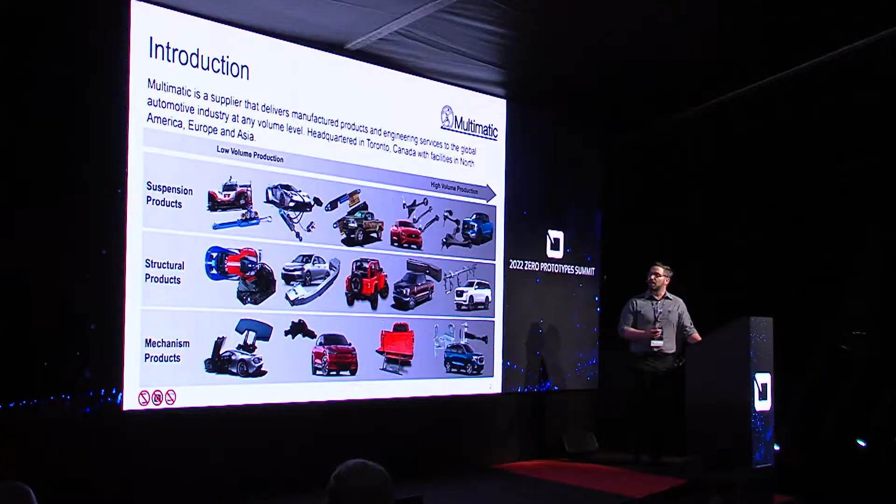Thank you, everyone. So a little bit about Multimatic. For those that don't know, Multimatic is a supplier that delivers manufactured products and engineering services to the global automotive industry. We are headquartered in Toronto, Canada, with facilities in North America, Europe, and Asia. Here's just a small subset of some of the products that we've worked on, and we go everywhere from low volume production all the way to high volume components and projects.

So Kevin and I fall under Multimatic Engineering. We deliver integrated design, analyses, and prototype testing for products ranging from individual components to full vehicle programs.

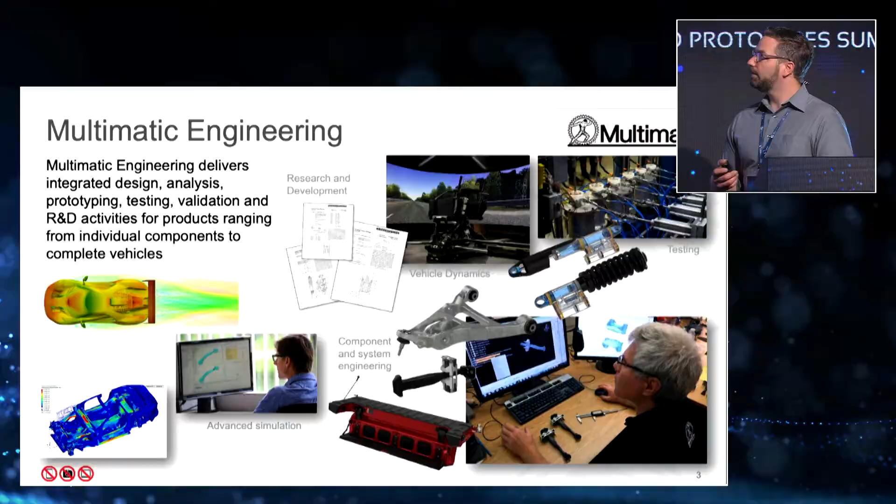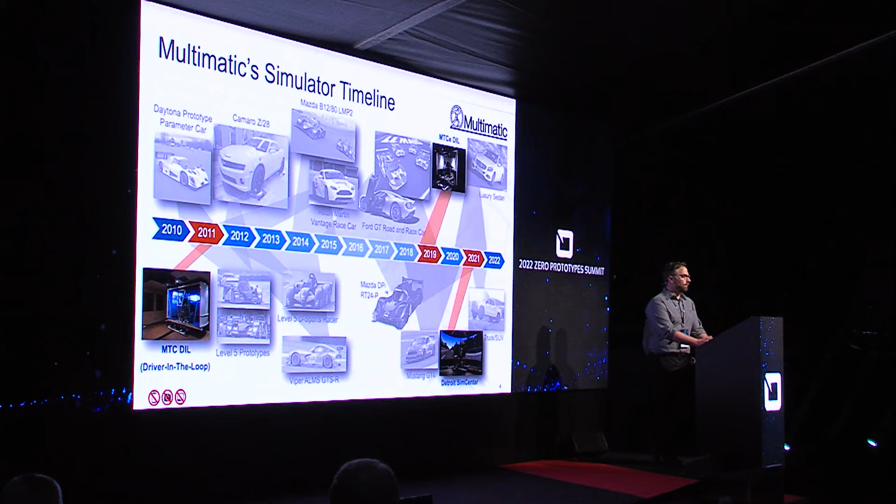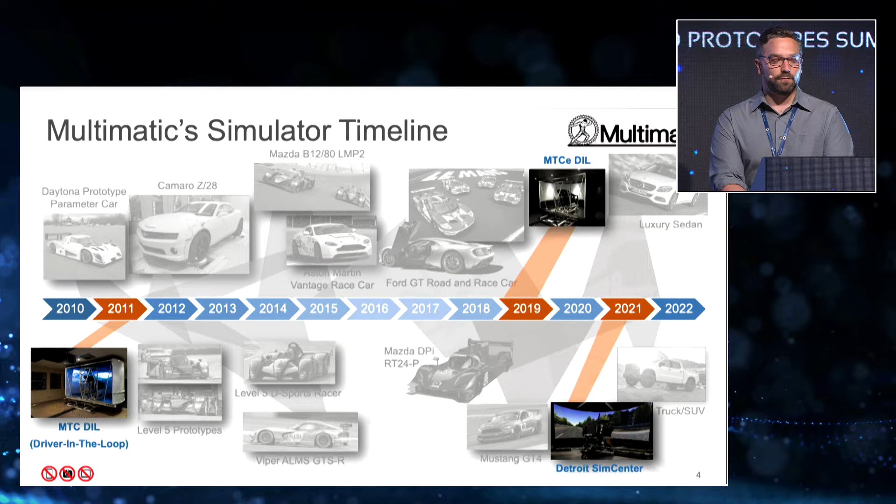Multimatic has quite a long-standing history with VI Grade and driver-in-the-loop simulators. In 2011, we installed the driver-in-the-loop VI Grade simulator at the Multimatic Technical Center in Toronto, Canada. In 2019, we installed a DIL in our UK office. And in 2021, together with VI Grade, we installed a DiM250 at the Detroit Sim Center in Novi, Michigan.

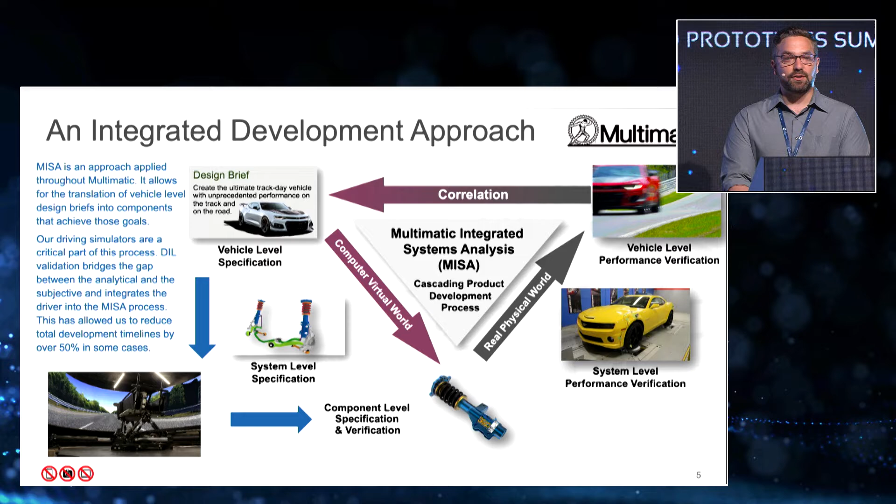So a little bit about the Multimatic Integrated Systems Analysis, or MISA approach. It's an approach that we apply throughout the company, and it allows for the translation of vehicle-level design briefs into components that achieve those goals. Our driving simulator fleet at this point is a critical part of that process and an extension of it. The DIL and the DiM validation bridges the gap, truly, between the analytical and the subjective, and integrates the driver into our MISA process. In some cases, this has allowed us to reduce total development timelines by over 50%.

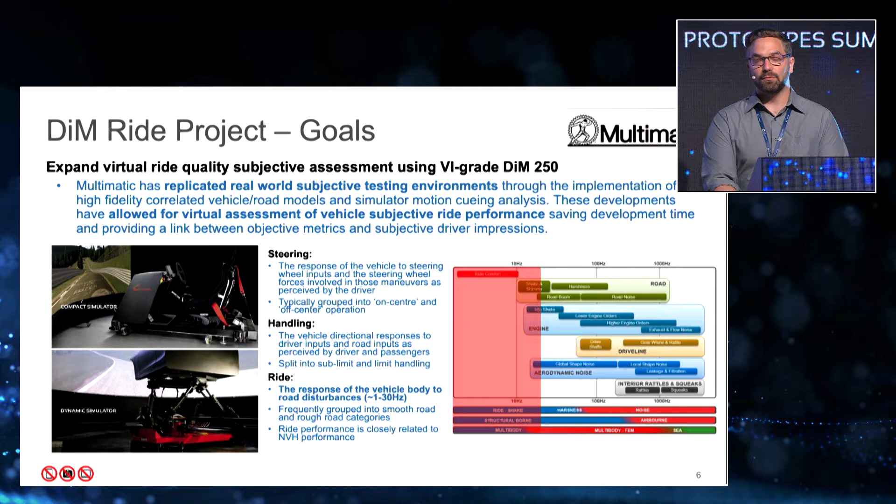So what are the goals of our DiM Ride project? We want to expand the virtual ride quality subjective assessment using our VI Grade DiM250. How do we do that? We've replicated real-world subjective testing environments through high-fidelity correlated vehicle models and our simulator motion cueing analyses. These developments allow for the virtual assessment of subjective ride performance, saving time and providing a link between objective metrics and subjective evaluations. When we talk about ride, we're talking about the response of the vehicle body to road disturbances in the 1 to 30 hertz range.

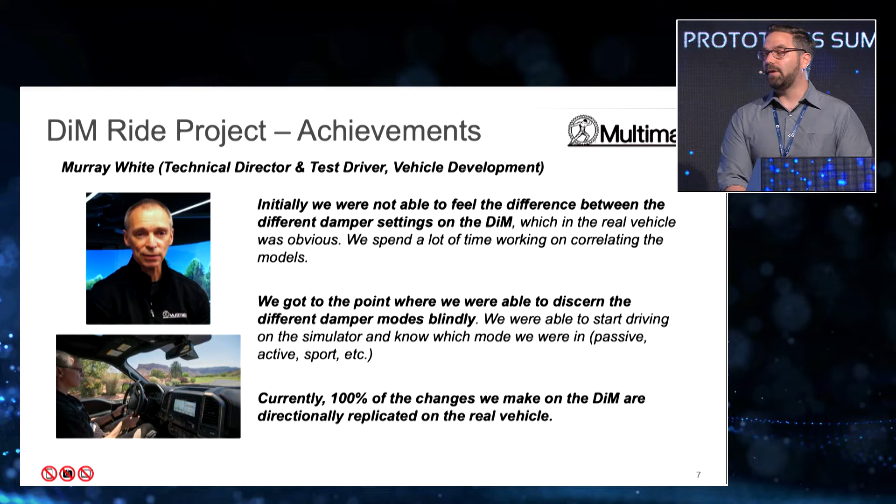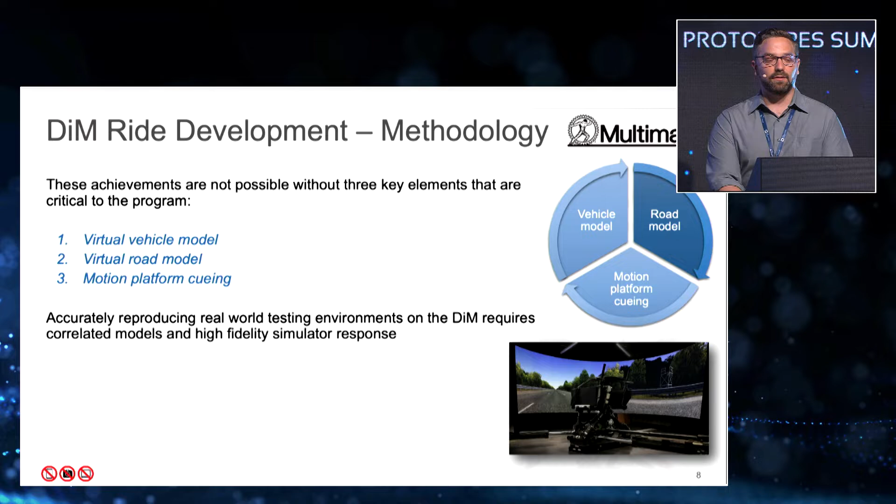So we've come a long way, and how have we done that? In order to achieve the goals we just talked about, we have 3 pillars that contribute to that: the virtual vehicle model, the virtual road model, and motion platform cueing.

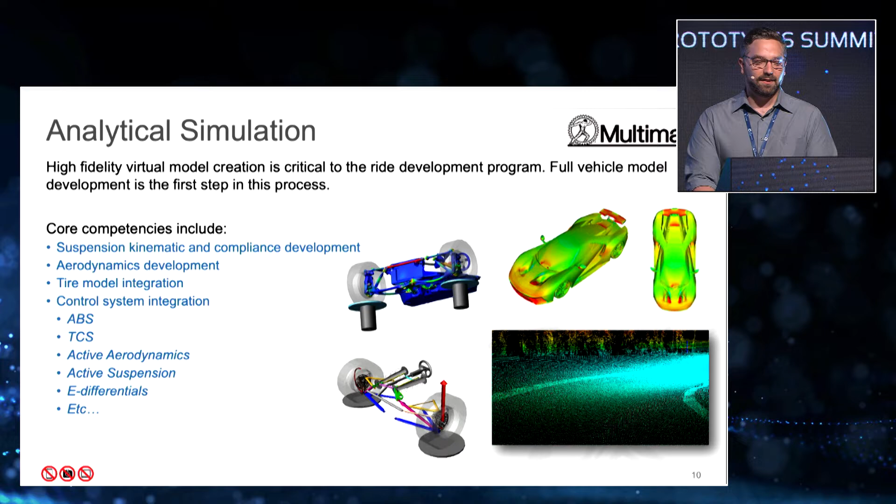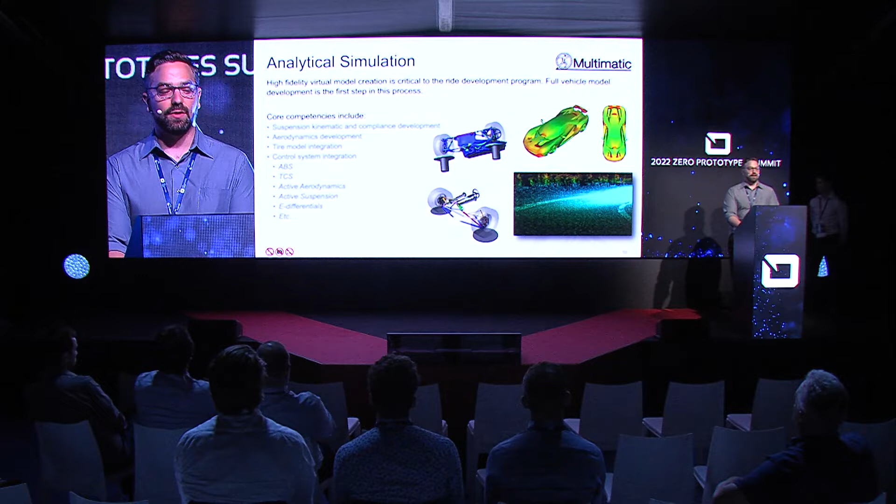For the virtual vehicle model, I think people in this room don't need too much detail, but one slide doesn't really do it justice. A high-fidelity virtual model is critical to the ride development program, or any program for that matter. Some of the core competencies and processes we use include suspension kinematic and compliance development, aero development, tire model integration, and all kinds of control system integration.

Obviously, a model is only as good as it can be correlated to the real world. So we use objective testing methods to make sure those models reflect the real vehicles. Some of the testing we use for that are 4-post, K&C testing, and road and track testing.

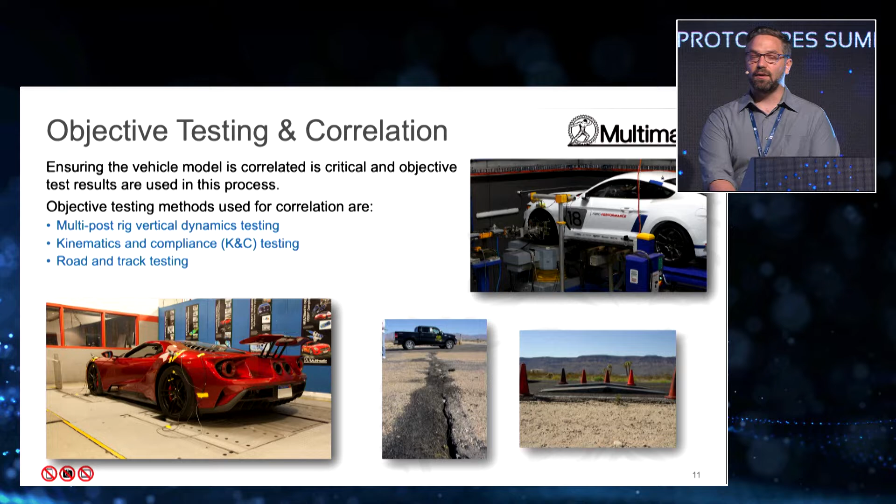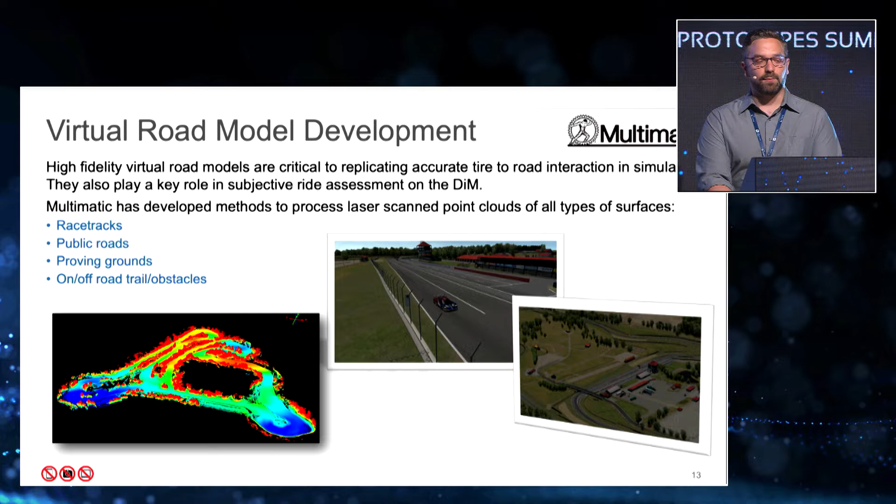In the virtual road model area, high-fidelity virtual road models are critical for replicating tire-to-road interaction in simulation, and they play a critical role in our subjective ride assessment. We've developed methods to process laser scan point clouds of all kinds of tracks, public roads, proving grounds, and obstacles. Laser scanning technology has come a long way. We have scanning techniques that can measure 10,000 plus points per square meter, typically more than 100 million points in an individual scan, involving an instrumented vehicle that scans the road surface and surrounding environment.

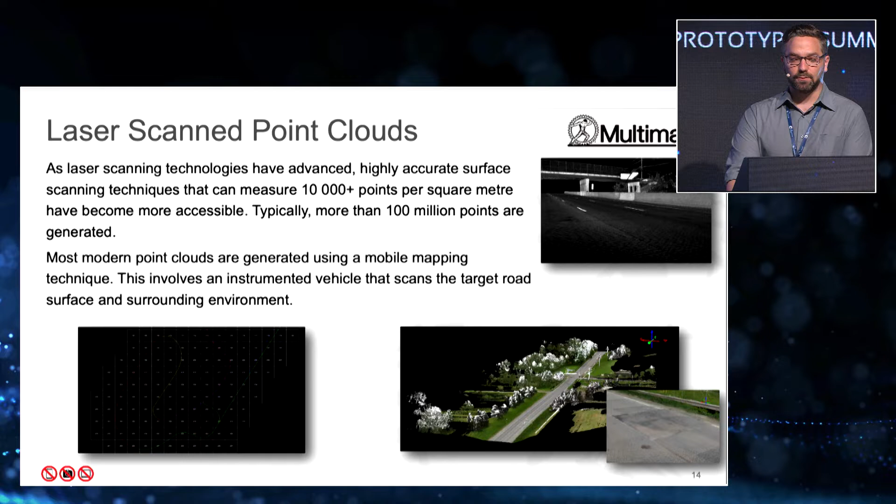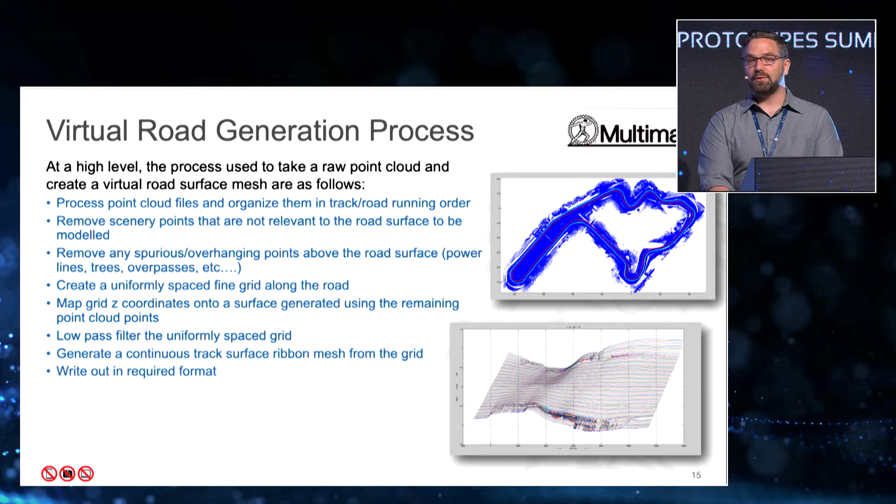So at a high level, when we generate a track model, what are we doing? We're removing the scenery points and points that are not relevant to the road surface we're interested in modeling. We remove spurious overhanging points like trees, overpasses, birds flying by, pedestrian walkways, all kinds of things.

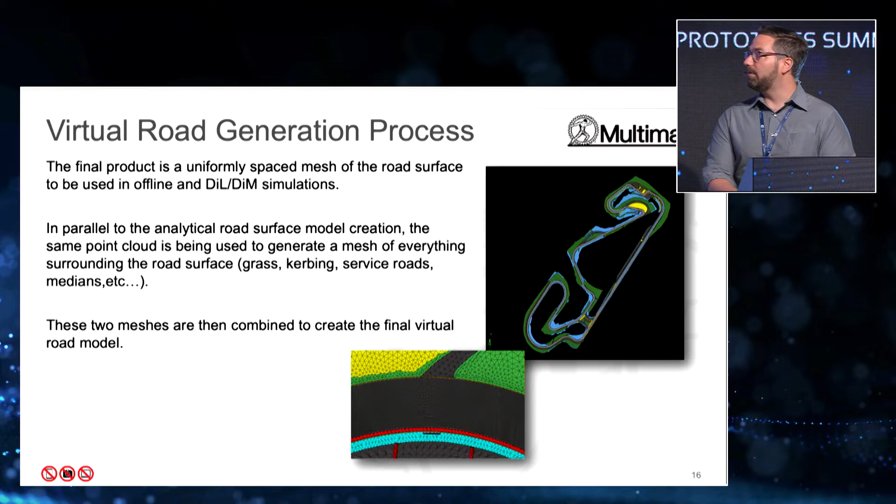We create a uniformly spaced grid, map the z-coordinates of that grid onto the surface, and then apply a low-pass filter to have the content we require within the road. We end up with a ribbon mesh of the actual road surface itself. In parallel, we're also creating a mesh of the surrounding environment. We combine these two together, and we're ready to drive in the virtual world on the model we created.

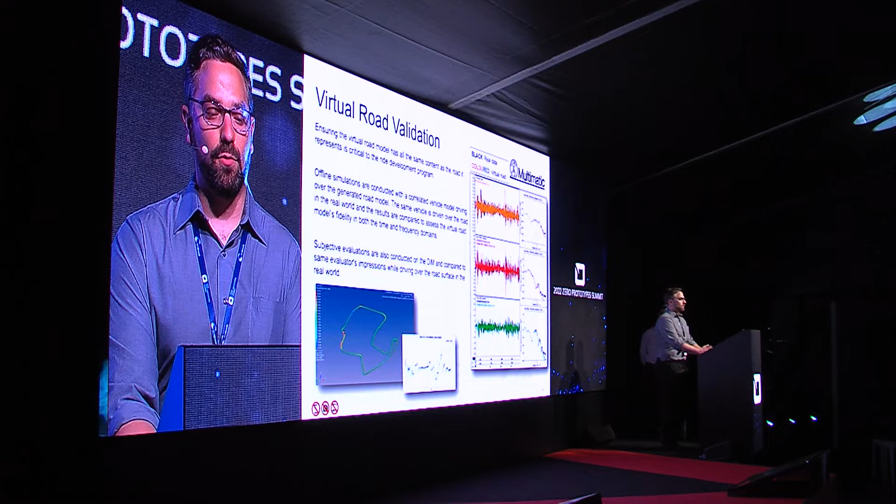Correlation is one of the most important factors here, so ensuring the virtual road model has all the same content as the road it represents is critical to make sure we have something that gives us good information. We use offline simulations with a correlated vehicle model driving over the generated road model, then take that same exact vehicle and drive over that same exact road in the real world, and compare those results to assess our model's fidelity.

Here we have an example of some of the road model development we've done. In black, we have the real measured on-car data for that road. In blue, we have a baseline road, and in red, we have an updated road. Some of the knobs we can turn when developing these roads are the element density of the mesh itself, and also the low-pass filter cutoff.

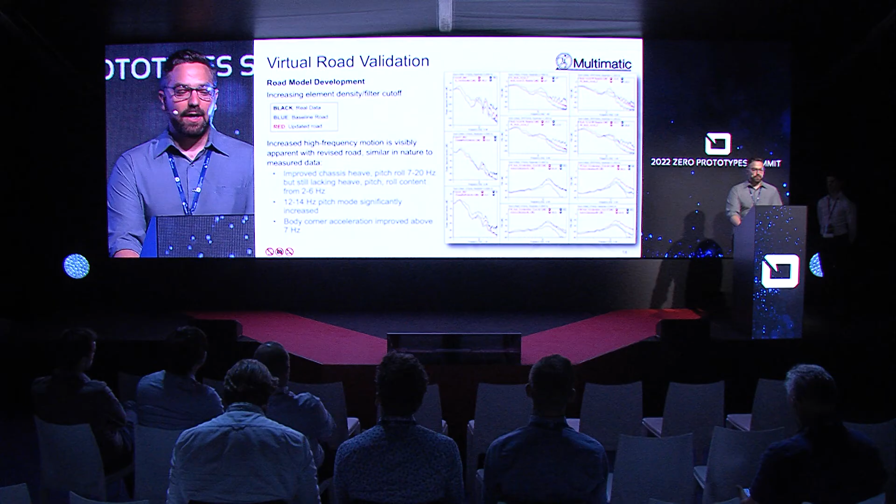So here we have a bunch of PSDs showing the difference in correlation to the real road - things such as acceleration, gyro from the IMU, X and Y, the hub accelerations, and body accelerations. These are PSD plots in the frequency domain.

You can see that the red road, the updated road, or the higher fidelity road from the laser scan, improves chassis heave, pitch, and roll in the 7 to 20 hertz range. In the 12 to 14 hertz range, it's a significant improvement.

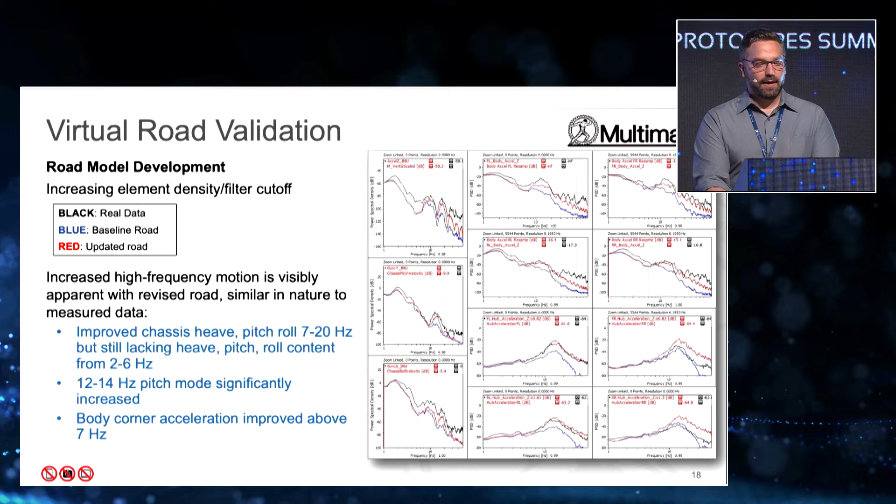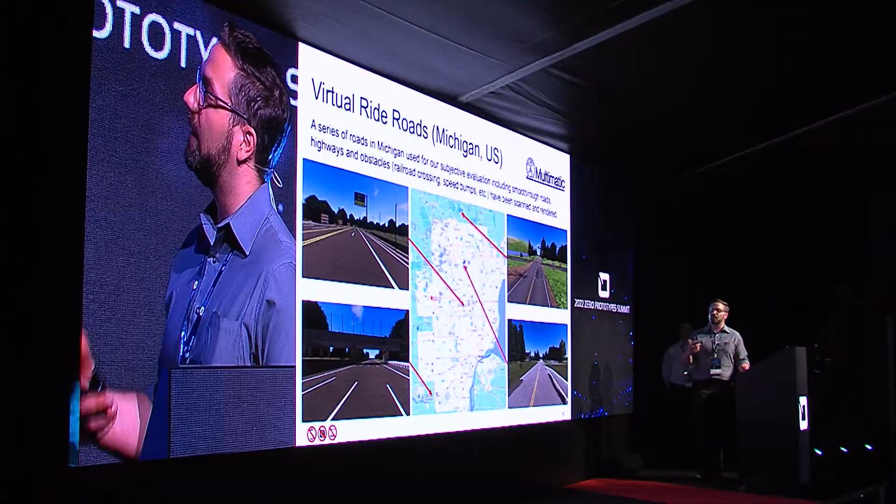So we can see how the techniques we use to develop these work. We've got a full suite of roads scanned in Michigan that we use for subjective and ride quality evaluation in the real world, and we've replicated that now in the virtual environment.

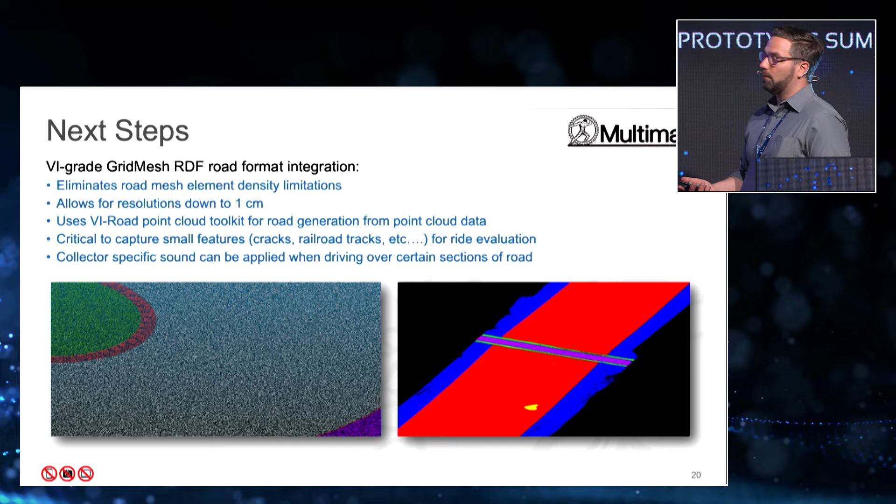Some of the next steps we're looking into is VI Grade's relatively new GridMesh RDF road format, which should hopefully allow us to eliminate the element density limitations we currently have with road meshes running live on the simulator.

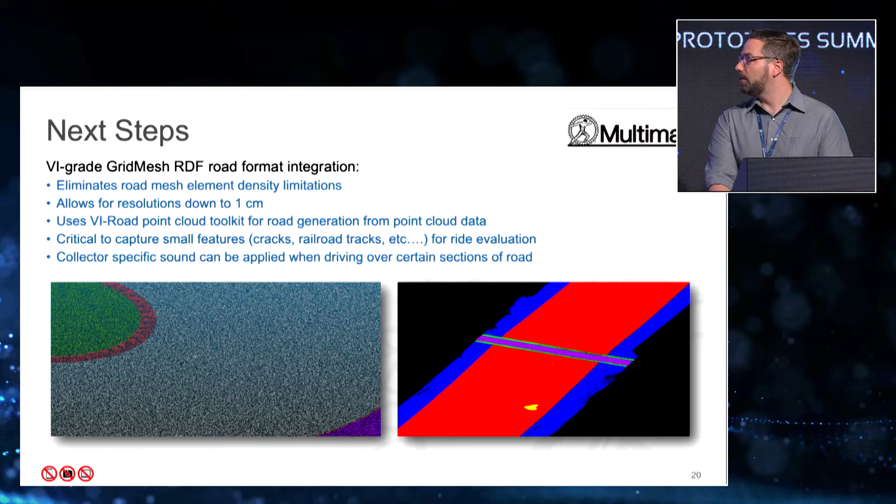This allows for resolutions down to 1 centimeter. It's really critical to capturing things like cracks in the road, railroad tracks you may drive over, and any small imperfections that a coarser mesh might not necessarily replicate 100%.

So now I'm going to hand it over to Kevin, and he'll go over the motion platform cueing.

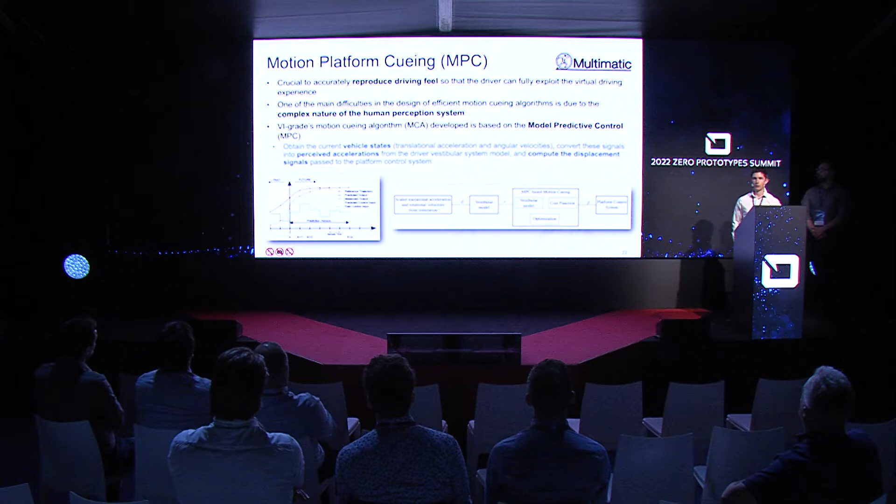The third pillar of the project was to work on the motion platform cueing. It's critical to reproduce accurate driver feel on the driving simulator in order to fully exploit the driving experience. There are two components: a software where an algorithm computes the platform displacements by transforming the vehicle state from the simulations into perceived acceleration for the driver model.

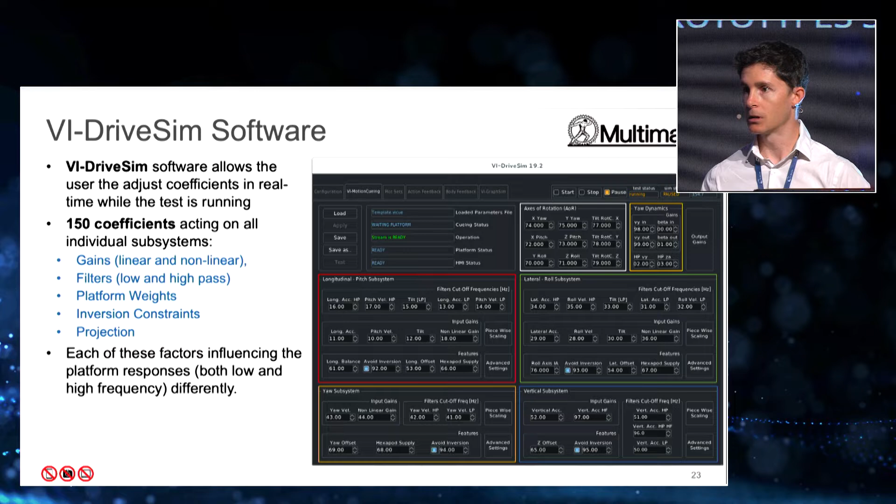We have been using VI Drive Sim software, which allows you to refine the feeling and the cueing to your particular applications by changing over 150 coefficients. And there is a hardware component, a DiM250, which we have been using at the Detroit Sim Center.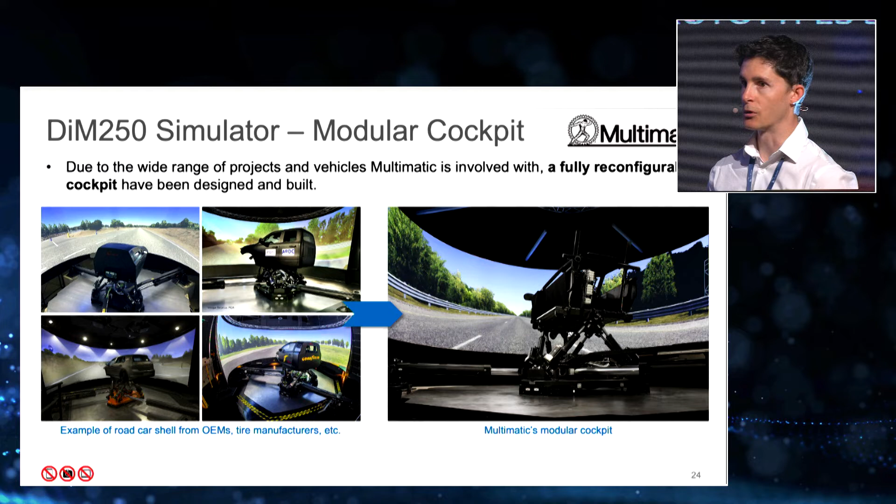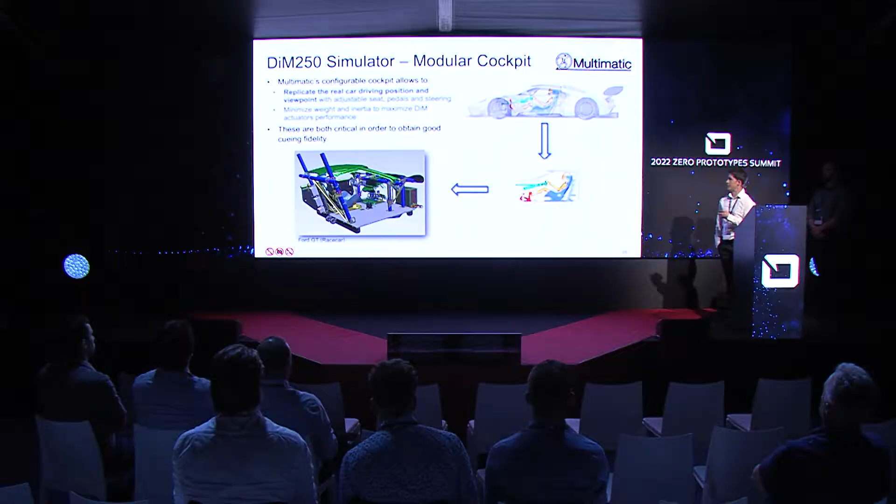And Multimatic, being involved in many projects, has built a fully reconfigurable cockpit. The advantage of this cockpit is that it allows us to replicate the real car driving positions by interactively changing components and locations, such as seatings, pedals, steerings, as well as the roof, pillars, and bodywork.

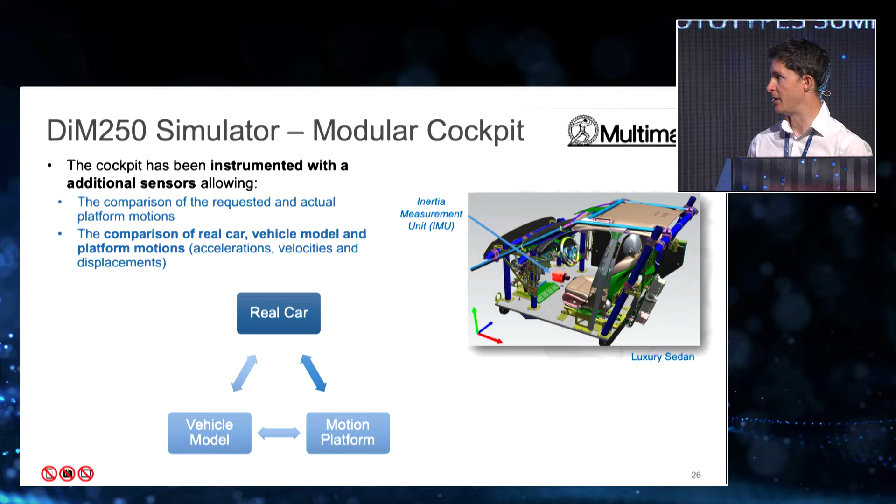We also instrumented our DiM250 with additional sensors, which allows us to close the loop and ensure correlation between our vehicle models, but also the real car, and the motion platform and the cueing that we provide to the driver.

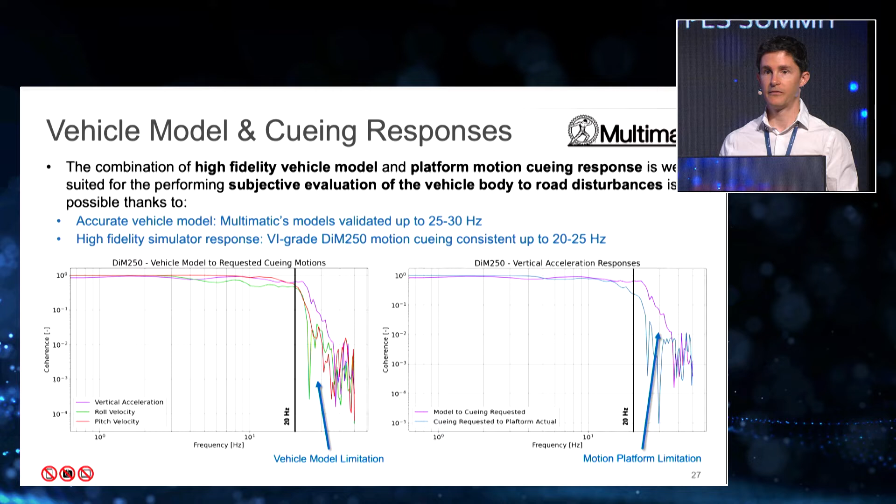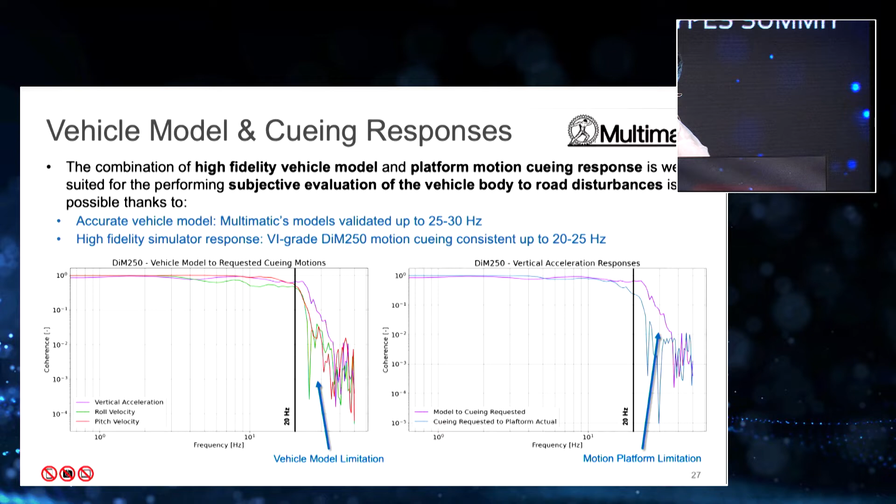And thanks to our vehicle models and our platform response and the high fidelity of it, which we are working on well up to a region of 20 Hz, as you can see on both of the current plots at the bottom, we were confident that it was a good environment to do our ride project performance testing.

One of the main knowledge we've learned during this process was understanding which of the cueing coefficients need to be adjusted to perceive and get accurate driver feedback.

As we mentioned earlier, motion cueing can change the perception of the driver for the same vehicle. And we found in our applications and made the initial assessment that we need to amplify the vertical degree of freedoms to do our ride developments.

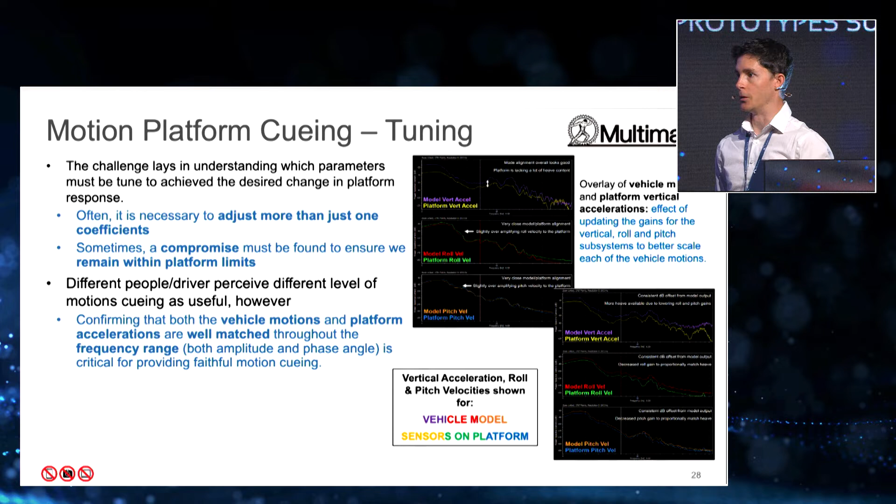But then once we align all the degrees of freedom in vertical, roll, and pitch, we proved that our driver was able to provide feedback not only on the verticals, but also on the roll and the ride performance of any given set of changes.

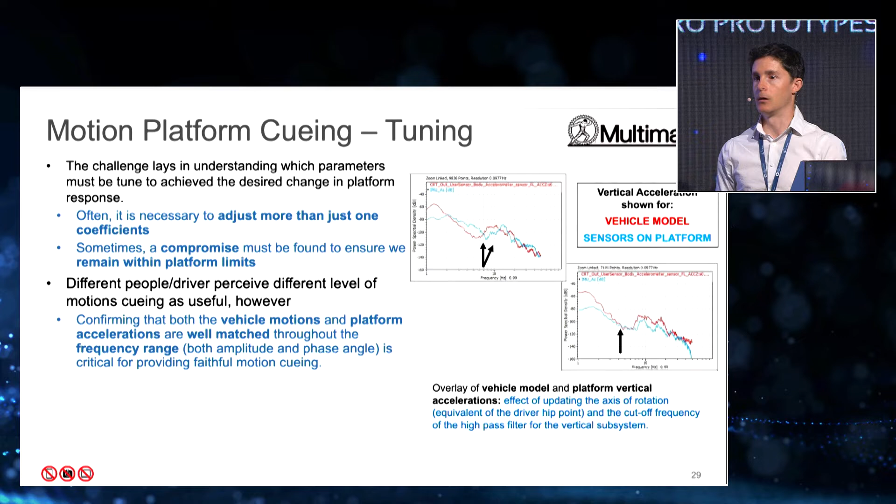The other important aspect that we found in our motion cueings was ensuring our amplitude ratio between our model and our simulations was maintained through the frequency range, not creating different modes or non-existing modes on the vehicles, whether from the body or the wheel mode, which were not present, which would provide wrong cues to the drivers.

Once we are able to validate our vehicle models and ensure we have adequate and optimal vehicle settings, we are able to apply it to actual applications.

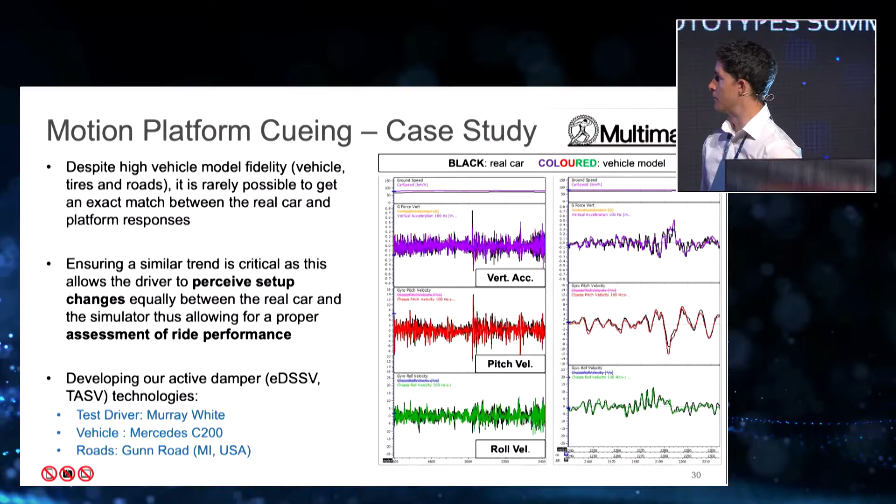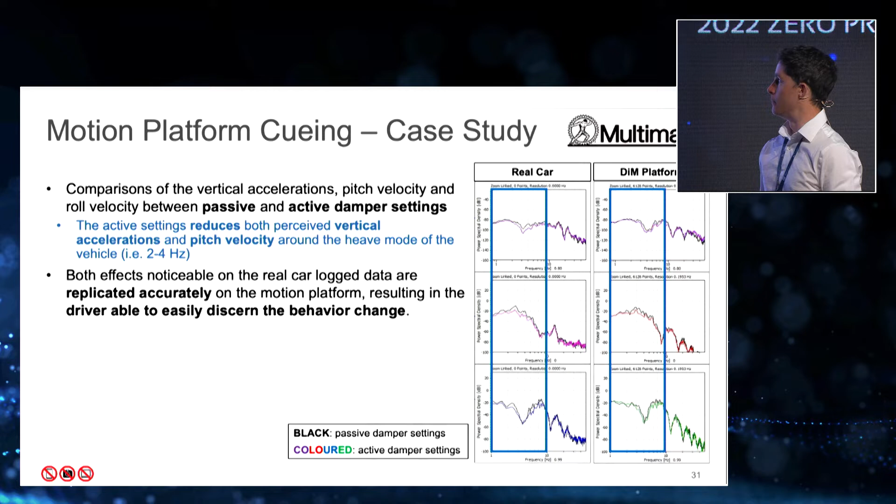And in this case, we have the real car on the left and our DiM platform, so the actual platform motion on the right, not the vehicle model.

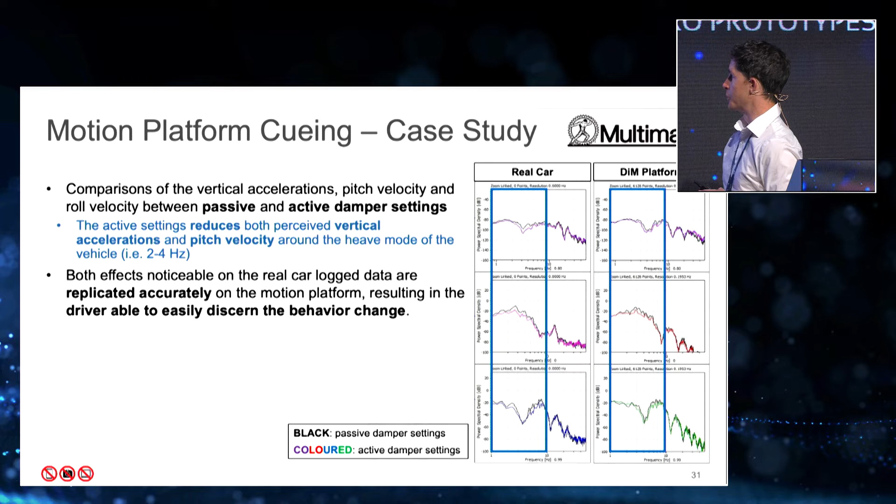And we are looking at a comparison between passive mode and an adaptive mode in color. And in both cases, we can see the influence of the damper change is replicated on both the real environments and the virtual environments.

Ensuring that the driver was able to provide feedback and even blindly detect which setup was on the car.

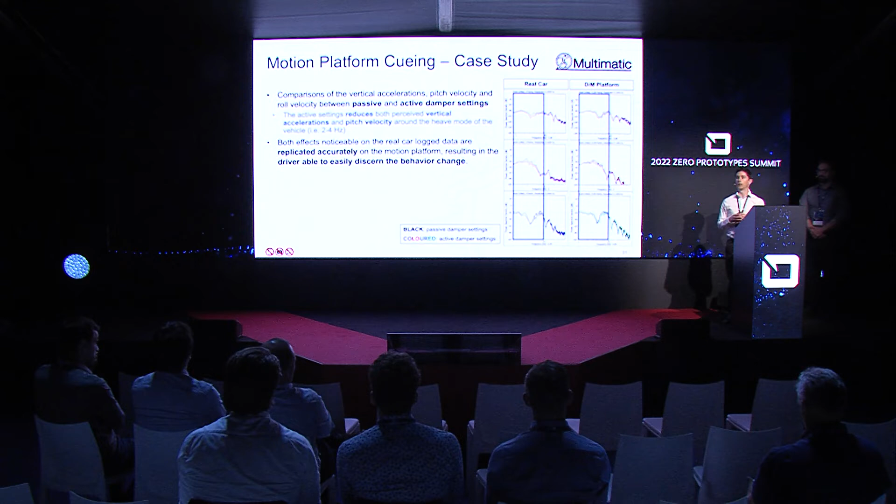Once we have obviously high fidelity vehicle models, we are able to go even further and use this technology to provide more subtle changes on one axle at a time, or compression ratio, compression to rebound ratio, a different software of our damper and adaptive technology in order to fine-tune.

And in almost 100% of the times, this replicates in the real world. So that means any testing and development we are doing on the simulator will translate to a real vehicle.

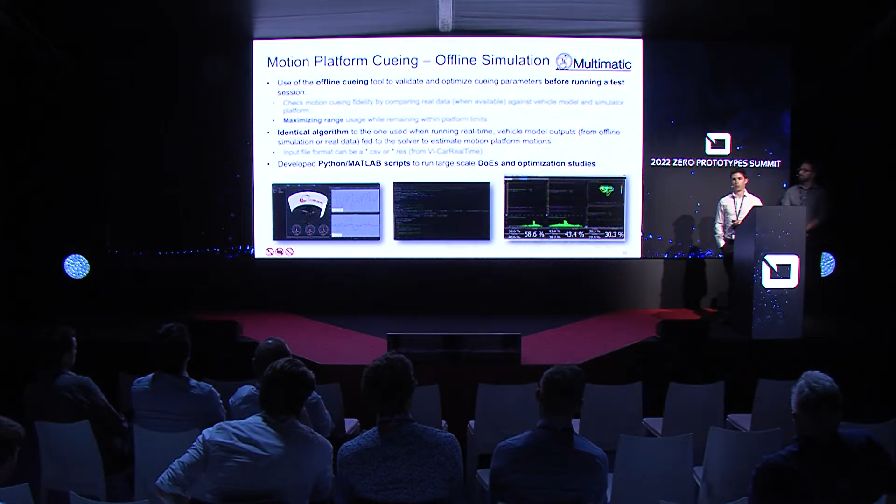One of the tools we have been conveniently using is our offline simulations, which we are able to use to predict, optimize, and validate motion cueings and our models, vehicle model and road models, prior to running a DiM simulation.

And then the last step is to put the driver in the loop, saving us a lot of time in the process.

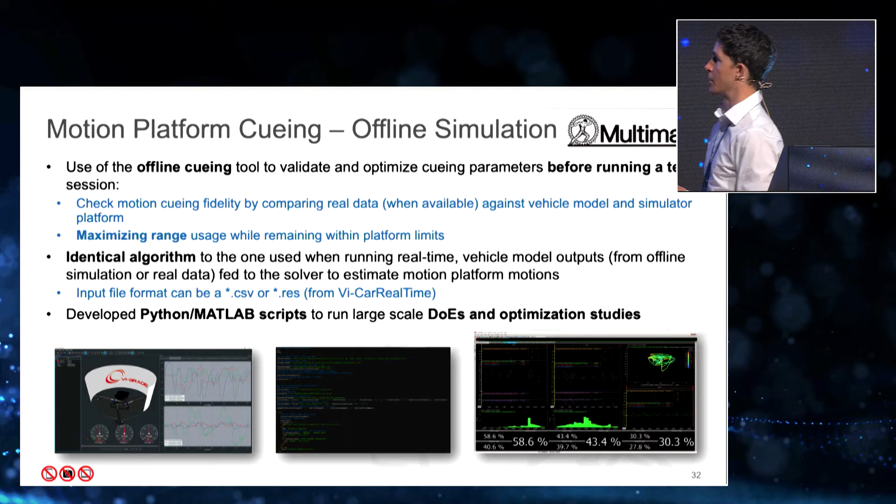So in recent months, we have been using our driver-in-motion very intensively for all the ride performance projects we've been involved in. And effectively, there are 3 vehicles we equipped with our adaptive damper technologies that have been modeled and run on the DiM250 in Novi, at the Detroit Sim Center.

The next step for us will be to bridge the gap between our primary ride and NVH in order to enhance and increase the range of simulations.

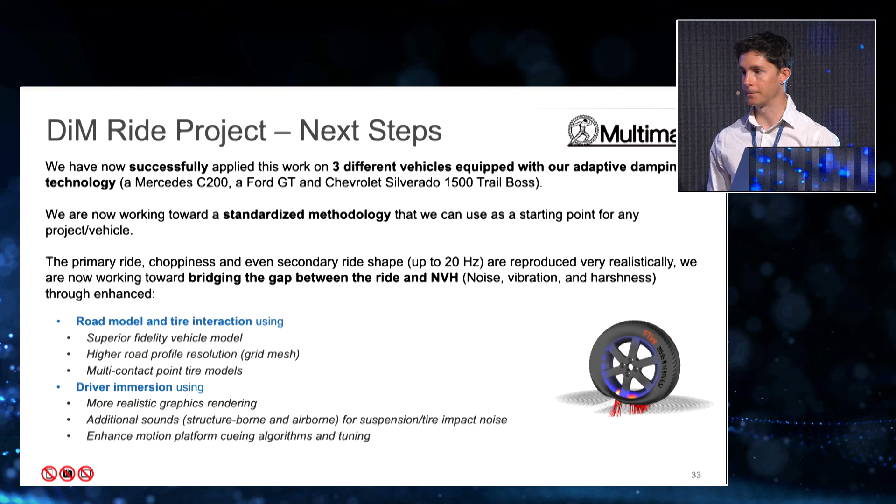And for this, we are planning to work on higher fidelity models to improve our road and tire modeling interactions. We started working towards implementing a new road mesh, as Peter mentioned, but also multi-point tire models, as well as audible cues for the driver, which have been important in terms of ride evaluations, particularly in terms of secondary ride and harshness. Thank you for your attention.